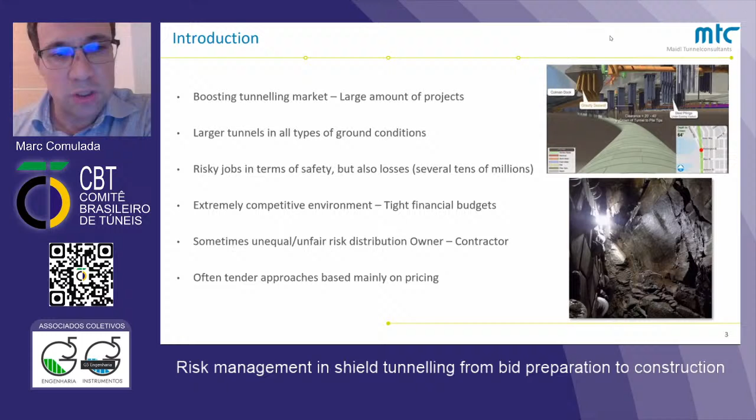So I think this is the framework, or let's say a snapshot of the present situation nowadays internationally. On the right-hand side I've put some photos. One is a snapshot from a video of the Alaskan Way viaduct replacement project in Seattle, with the largest EPB ever. You can see it was constructed very close to several foundations of the viaduct, in difficult ground conditions. At the bottom, we have a photo of difficult blocky rock conditions, which is the geology, and the technical conditions we encounter are one of the main aspects of risk.

Going to the tender documents, firstly there's this code of practice I'd like to show from the International Tunneling Insurance Group, where the insurers made a very nice exposition of the situation and how to best reduce risk, like what's the main structure one should follow when doing risk management. It's a completely voluntary code of practice, not a norm or anything like that. And it applies to project development, design, contract, and procurement for construction, so basically to everything except the actual operation of the tunnel.

It defines the basic structure of a risk management process that starts with hazard identification and their consequential risks in the different project stages. We obviously have many project stages to consider. Then we have the evaluation of hazards and their probability of occurrence. And then one of the key issues, which is the definition of strategies that are appropriate for preventive actions and for contingent actions.

And then they also recommend and explain the use of risk registers, which everybody more or less is doing—preparing the different risk registers for the expected risks. The risk registers actually are documents that clearly indicate which party is responsible for the control and management of the different risks. So it defines the risk allocation, which is actually a very important aspect—who's responsible for what.

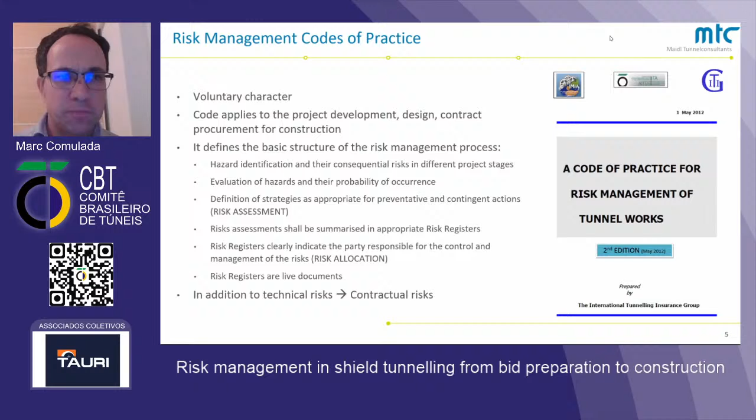So to start with, we also have the baseline conditions. The baseline conditions are the conditions given generally in the tender documents, and one of the main aspects are the geotechnical baseline conditions. Here we have, for instance, from the American Society of Civil Engineers, the GBR, the Geotechnical Baseline Report guidelines, which define the risk and liability framework of owner versus contractor. They're actually very well formulated guidelines, which unfortunately are not always followed, or very rarely followed. The idea of a GBR is to set clear, realistic baselines for the conditions anticipated to be encountered, and provide all bidders a single contractual interpretation of what is expected—so a fair starting point for all bidders.

And then obviously the other main purpose of the GBR is to understand all the ground and groundwater conditions at the site, and also to be able to estimate the financial risks associated with all these conditions, and very importantly, to clearly allocate the risks between owner and contractor.

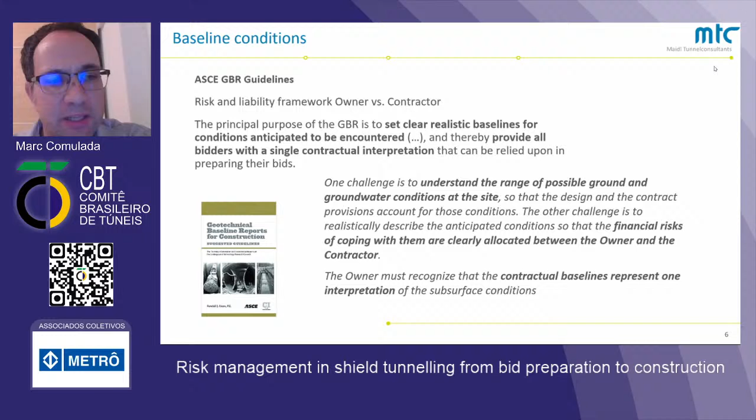Many situations, but in the US, from projects we know, they do follow these guidelines quite well as far as possible, because the geotechnical investigation is never good enough to make a completely fair and perfect baseline, but still it works quite well there.

We also have the FIDIC Emerald Book, Conditions of Contract 2019, which points out how important risk allocation is. The FIDIC conditions clearly state that you have to foresee potential remeasurements in time and cost—trying to be more fair to contractors, providing tools to measure if you encounter different conditions than expected, and to remeasure those differences and provide compensation if possible.

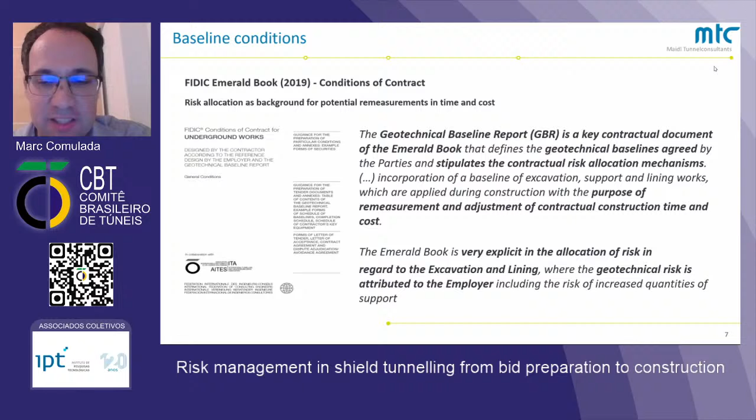So we do have these guidelines and conditions, which are all actually very fair and nice, but unfortunately it's not always as nice as these guidelines attempt.

So then if we go to the bid preparation stage, that's when the contractors receive all the documents and have to prepare a price at the time scheduled for the project. So it's vital to frame all the risks involved in that project.

On the right-hand side, I've got this table. We'll go through several topics in this bid preparation aspect: one is the ground conditions, then the design, then some case studies or examples, and finally the risk and opportunity evaluation.

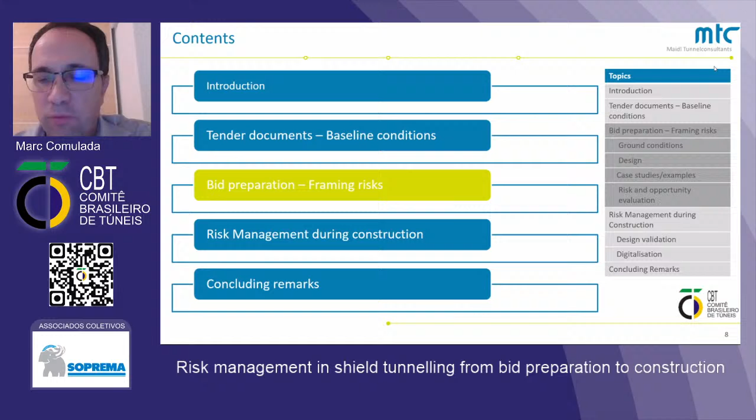The ground conditions are the key starting point for everything—for designing the works, for assessing and pricing the risk of your bid. They are one of the aspects that have a major effect on time and cost in tunneling, and insufficient ground investigations or poor interpretation of those investigations is one of the most frequent causes of collapses.

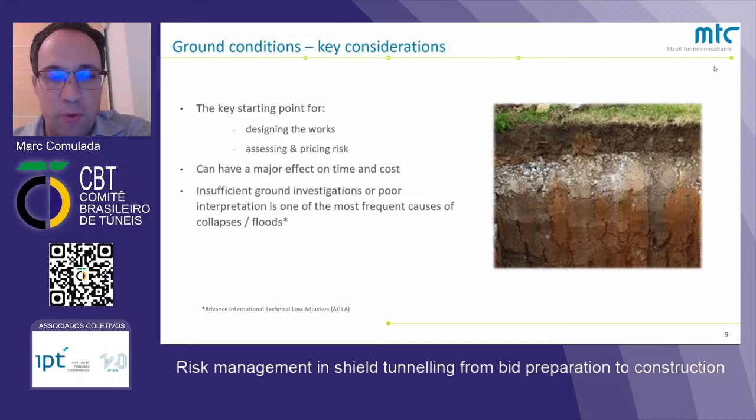This is information from the Advance International Technical Loss Adjusters. So obviously this is the first starting point: making a good soil investigation program and a good interpretation of that information.

But in reality, investigations are often limited. In tunneling it's always going to be limited—there's always a maximum number of boreholes we can realistically do. At the tender stage it's sometimes pretty critical; there's quite a lack of information, plus short tender periods, and reality shows it's difficult to assess this risk accurately.

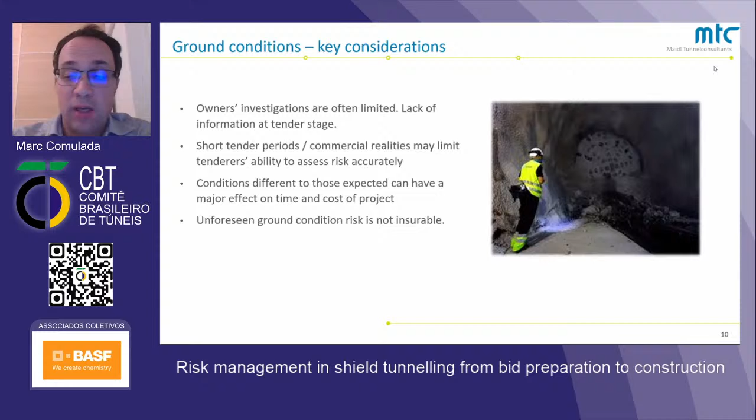Conditions different to those expected can have a major effect on time and cost of the project, and that's where the ability and experience of different contractors in preparing their bids comes in—actually being able to measure and frame these risks. Another important point is that generally ground condition risk is not insurable; it's not an accident covered by insurance.

Just to point out a little—I think most of you watching the webinar know this, but it's important to make the difference—an overall view of the ground we can encounter in tunneling. On one hand we have soils, which are generally unstable ground conditions where actual support is required; otherwise we can have a collapse or instability.

And it's not only about stability, but also about settlements, especially in urban areas, where we induce settlements at the surface or even underground if crossing underground structures, which have to be controlled. Other aspects that directly affect cost, time, and potential losses for contractors include tool wear in abrasive soils.

A soil doesn't mean it's easier or less abrasive than a rock. There are soils much more abrasive than rocks, for instance, to cut or excavate the bottom. And then we have another big issue: sometimes it's clogging in sticky soils, which hinders the projects and produces additional costs.

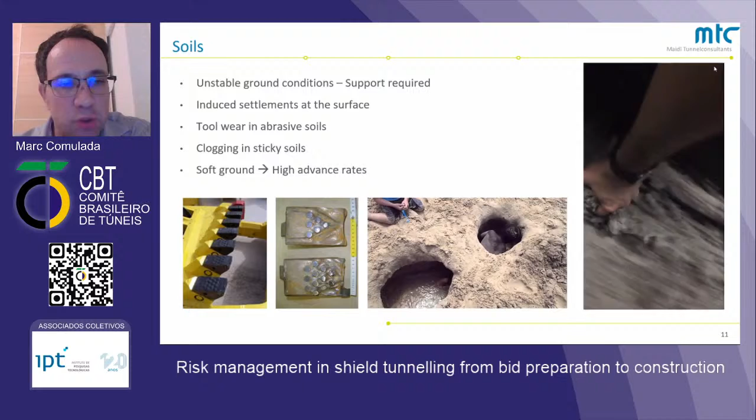The upside of all this is that generally in soft ground, contractors can attain high advance rates. They can expect high performance, which is always good, one of the positive aspects. And of course, soils can be unstable and tools wear. So all this has to be considered in the bid preparation, obviously.

In rock conditions, here at the bottom left, you have a very nice rock with a flat surface. You can see the paths of the disc cutters. So we have a situation where it's hard rock, but it can be excavated relatively easily. But still, generally, rock implies high tool consumption due to the wear and the energy needed to actually cut the rock.

The rock is cut with the disc cutters, forming the chips you can see here on the top right. This is the main purpose of the disc cutters installed on the cutter head: to generate these rock chips, which we can easily transport outside the tunnel. However, it's not always like this.

Many times we have blocky or fractured rock, and when we cut into it, the fractures can generate loosened blocks. You can see a very big block here loosened in front of the cutter head. Obviously, when the cutter head is turning, trying to cut this rock, it will suffer severe damage. Trying to cut this block, it will be moving, and it won't be nice rock like the one we see on the left.

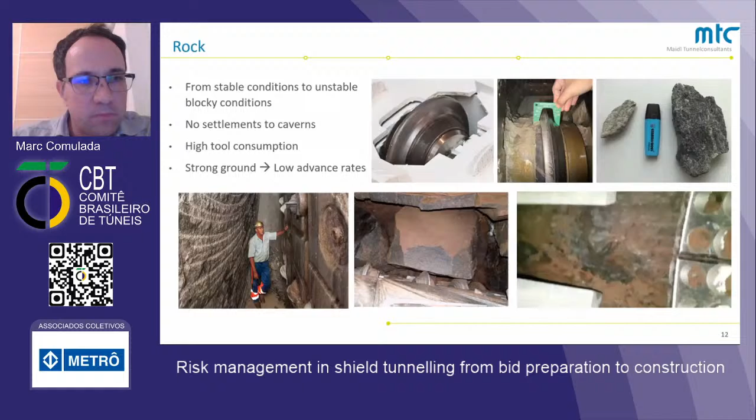And then we have mixed ground. Many of you watching this video from Brazil have experience with these grounds. We've lived them, we've had them, we've got experience with them in Sao Paulo and Rio, and it's actually pretty tough. What does mixed ground consist of?

This is a long section in Singapore. We have several areas in the world with a lot of mixed face conditions, especially in tropical weathering areas. The yellow layer here is a residual soil resulting from the weathering of the rock, which is located at the bottom in orange color. So in this case, we have the tunnel, the two red lines crossing exactly the transition between the sound rock, the good rock, and the soil.

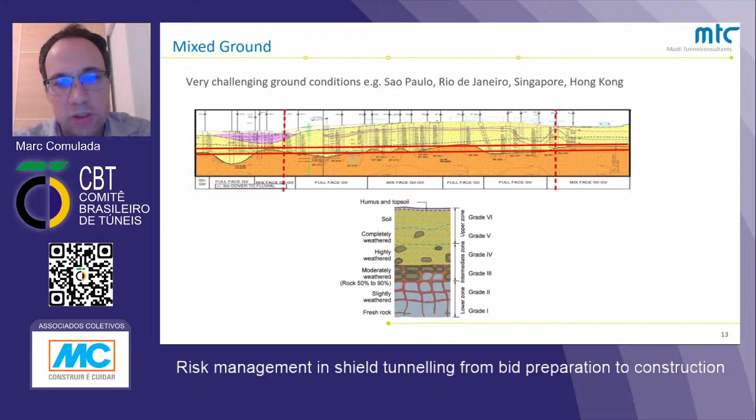This mixed ground condition poses a lot of difficulties when excavated with a shield, in shield tunneling. Here you can see the typical weathering grade of the rock: at the bottom, grades 1 and 2, basically good sound rock; grades 3 and 4 start to be more fractured. And as we go further up, closer to the surface, grades 5 and 6 are already more or less like soils.

Let's look at this in photos from reality. We start from the bottom left. Here you can see sound granite at the very bottom, weathering grade 1, 2. As mentioned before, a flat surface, no blocks, and you can cut rock chips very easily and nicely on this face. But still, we can have a high tool wear rate, since it's hard rock, and this generates a lot of wear on the tools.

Then we have conditions where the rock is starting to get more fractured, like rock grades 3 and 4, and we start having more blocks on the tunnel face, loosening of blocks. Here, in addition to the high tool wear rate, we also have impact loads acting on the cutters, generating more damage. And if we continue further up, closer to the surface, we get a higher weathering grade. Part of the rock has already weathered into sort of soil, but we still have sound rock boulders within that matrix.

And here we start getting these boulders trapped into the openings of the cutter head or trapped between the tools, and we start to have blockages, and they start to drop in addition to the other ones we already had. And finally, when we get to the upper layers where we have more soil, then we start having ground instability. The soil isn't stable, so we have to start stabilizing it, pressurizing the shields, generally with water.

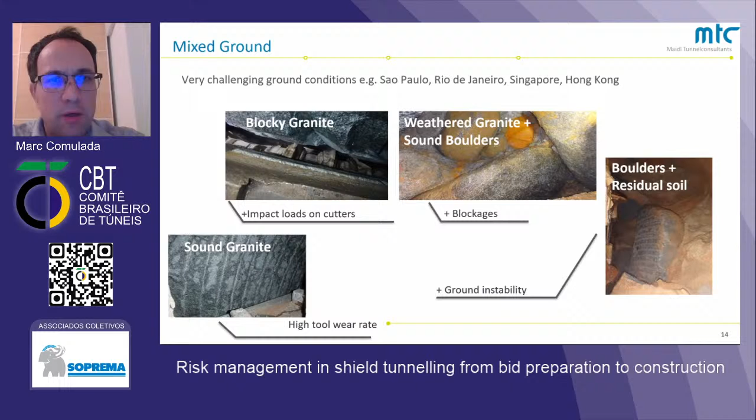So in this situation, you can imagine we have a whole combination of risks that are occurring at the same time on the tunnel face. And then there's obviously a variety of additional risk conditions related to the ground or indirectly to the ground, like karstic cavities, for instance. Then environmental risks, like contaminated soils.

We have the situation of the two super large EPBs in the Westgate project in Melbourne, Australia, where the shields are built there, but they've been stopped now already for several months since they found out the soil contains PFAs, which have to be treated very specially with special disposal sites. And this is delaying the whole project. This is a risk that just appeared.

And then we have sometimes restrictions to the construction procedures. Sometimes we have space restrictions, and we have to build the tunnel or advance the shield without installing the backup, for example. And you can't have a continuous drive. You have to excavate, let's say, 10, 15 centimeters, then stop, extract the material by cars, whatever, and then you can start again. So there's sometimes these restrictions to the construction procedures, which imply additional risks to the tunneling process.

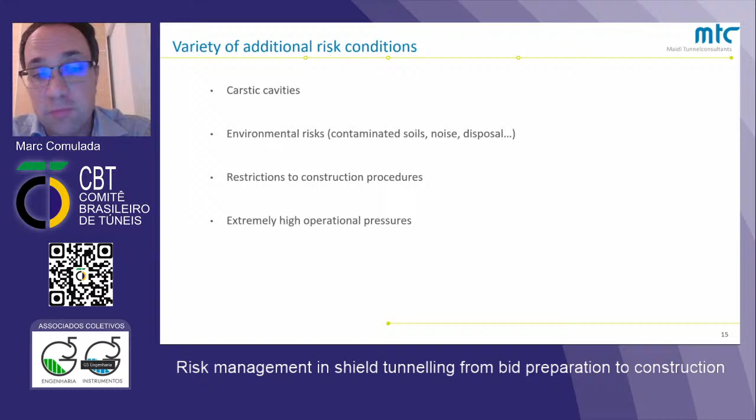So how do we deal with this? We have this wide range of geotechnical conditions, wide range of technical and geomechanical parameters from the soil investigations. We normally have a minimum value, a maximum value, an average value, quite a wide range. And many times the information is not as complete as it should be to have a full view of all the risks or to quantify all the risks properly. The information is rarely available completely.

So we have this problem because these are all key input values, these ground conditioned parameters, these geotechnical parameters. They are key input values for the construction method and equipment selection, number one, and also to estimate the performance of your tunneling works and the consumables. So all the things that are generating cost and time, you base mainly on the geotechnical conditions, and these are not always as complete as they should be.

So there's a lot of interpretation going on there. Obviously there's a high degree of uncertainty. And that's why an approach, at least what we follow, is to follow several scenarios: a base case scenario based more on average parameters, a best case scenario based on good technical parameters, and a worst case scenario based on the poorest geotechnical parameters, more or less.

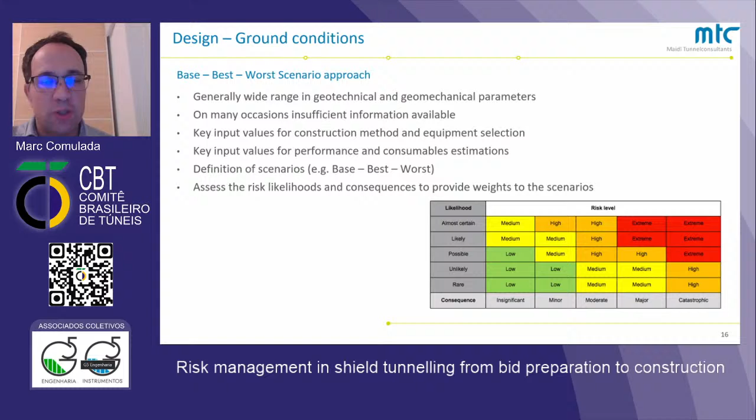So this is basically how contractors have to deal with these risks. And this is very summarized. It's all very complex. There's a lot of studies to do this during the bidding stage in a very short time. But this is more or less the procedure.

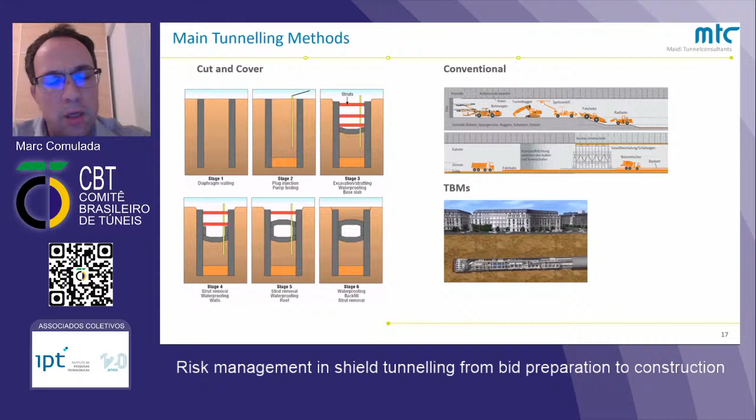And then, of course, based on all this, you have to decide the main tunneling method, which most of you here know about, and we are focusing today on TBMs. Sometimes the tender documents already prescribe the construction method, but sometimes the contractors have to decide which is the best method, and that is all based always on these geotechnical investigations.

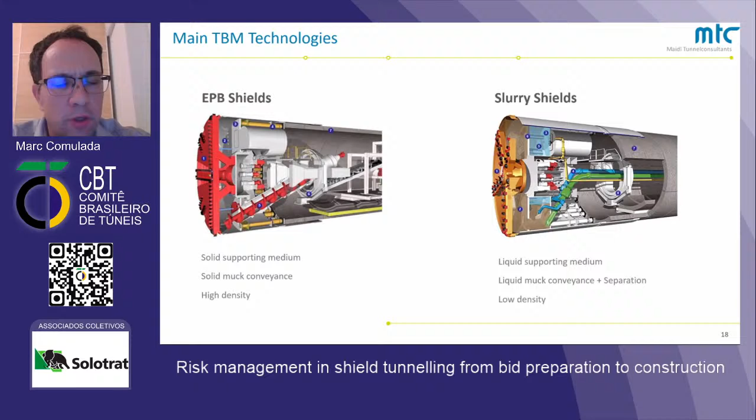Obviously then focusing on TBM technologies, as I mentioned, that's the title of the webinar. So as you all know, we have EPB shields and slurry shields. The concept of EPB works with high densities in the excavation chamber with dense muck, whereas the slurry shield works with more liquid muck, what we call a low density. This is a crucial difference in selecting the two methodologies. And in between nowadays, we have what we call the hybrid shields, like the variable density shields of Herrenknecht shown here in this picture, where you can adjust more or less the density in the excavation chamber, covering the scenarios of both EPBs and slurry shields.

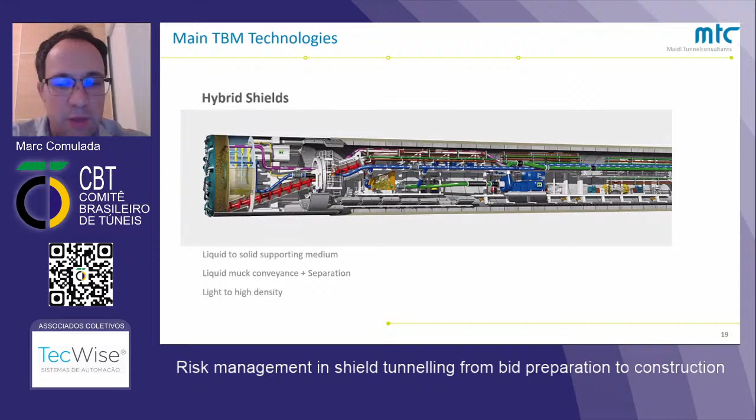Well, these are things that we explained, I think, in the previous webinar. And then, so based on the ground conditions, we can do a selection of the TBM. That's, as I mentioned, something we dealt with in the previous webinar with Ulrich.

But there's other factors which are very important for the contractors when deciding what technology to select. One can be as easy as the availability of refurbished TBMs, because those you don't have to build from scratch, so they're available in a shorter time. That shortens your construction schedule, but maybe they're not the 100% perfect TBM for that ground. Then there's also other aspects to be considered, like restrictions on muck disposal, the surface available on site for site installations, and obviously also the experience of the bidding team. We have remarkable projects where the technology has been selected sometimes more based on these factors than on strictly geotechnical factors.

So all these factors, it's not only the geology in this case, there's all these factors that are then, let's say, molding or varying the risk level of the project.

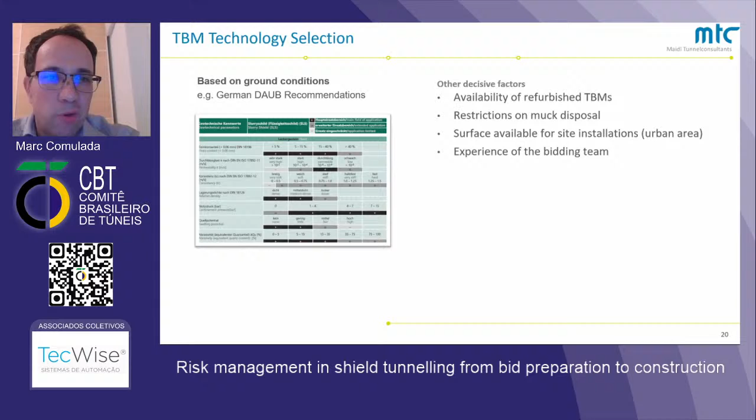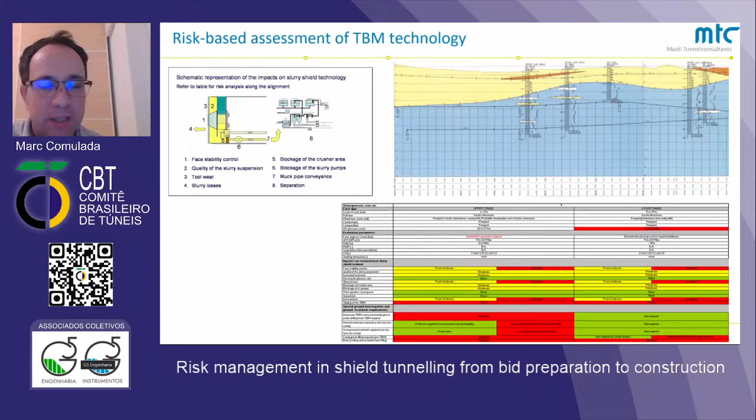Then we can do the same comparison for a slurry shield technology, comparing different aspects also for different critical processes on the slurry shield technology. And in this case, you finally come to the conclusion that, for Kuala Lumpur, a situation between an EPB and a slurry shield would be optimum, and that's more or less where the variable density shields were born, in a situation like this.

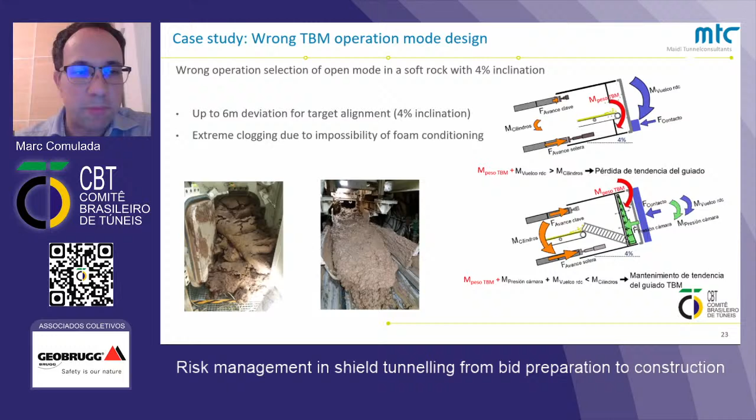There's another aspect, as I mentioned, we're focusing this from the view of the contractor, from the view of the TBMs, and you have the cutter head. The cutter head is one of the key components of shields, in charge of cutting the ground and evacuating it as efficiently as possible from the face towards the excavation chamber and then outside the tunnel. So the design, with the quantity of tools, the opening ratio, and the distribution of the openings of the cutter head, has to match the ground condition extremely well.

It's also the component of the TBM that suffers the most wear and tear. And obviously, with larger diameters—projects are getting larger worldwide—we have higher wear rates, as we discussed in the previous webinar.

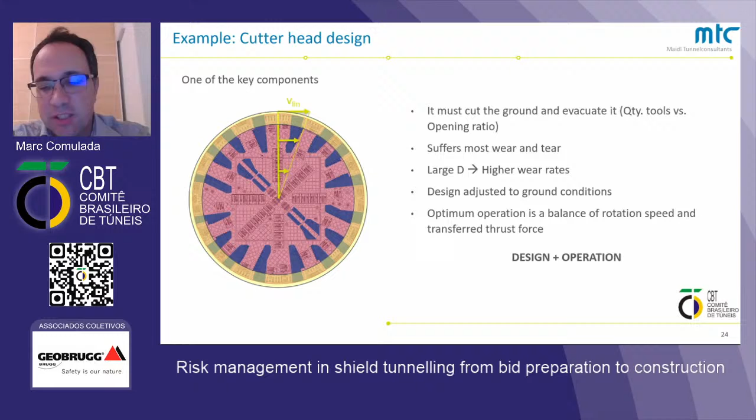So the design of the cutter head is crucial and has to be adjusted to the ground conditions. Then there's the operation: not only of the cutter head, but the balance of the adequate rotation speed and the contact force of the cutters against the tunnel face. That's also crucial to avoid the risks of damage and excessive wear on the tools and the cutter head. So the cutter head is a design and operational issue that has to be taken care of.

Continuing with the cutter heads, so that you realize how the ground conditions influence the design of the cutter head, I'm showing two extreme cases: a purely rock TBM cutter head, very closed, with a lot of discs.

You need a lot of disc cutters in order to cut that rock into little chips that then fall by gravity and are picked up by the buckets you can see here on the periphery and transferred behind the cutter head.

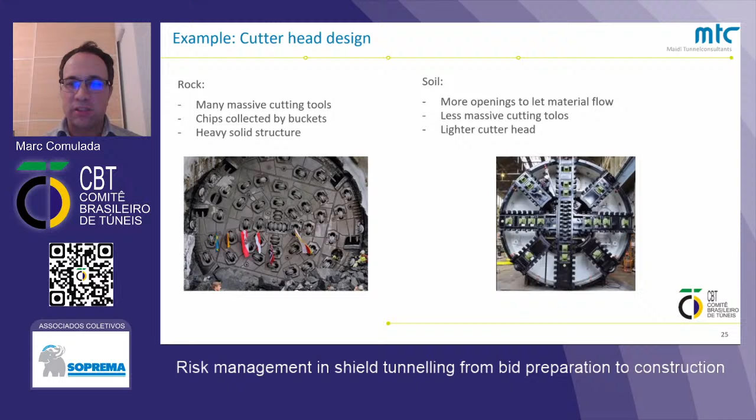Whilst in soils, we have a situation with a much lighter cutter head. It's not going to be as robust as the cutter head in rock. It doesn't have to handle such high forces. It's just got to allow the soil to flow towards the excavation chamber, and you need less tools to excavate it.

But then, as I mentioned before, with mixed face conditions or mixed ground, we have a compromise design, because we have situations with rock, situations with blocks of rock mixed with soil, and situations with purely soil. This is where we have to approach a compromise design.

In this case, you have a cutter head that has to handle also very different forces. You can have rock at the bottom and soft soil at the top. So you have a very high imbalance of reaction forces against the cutter head, which has to be considered in the structural calculation of the cutter head.

Actually, there are projects where there's damage on the cutter heads due to these high different loads. And in addition, there's other elements like the tools. You can see broken disc cutters, or in the openings, the grizzly bars components that are bending on the cutter head due to the presence of blocks, for instance.

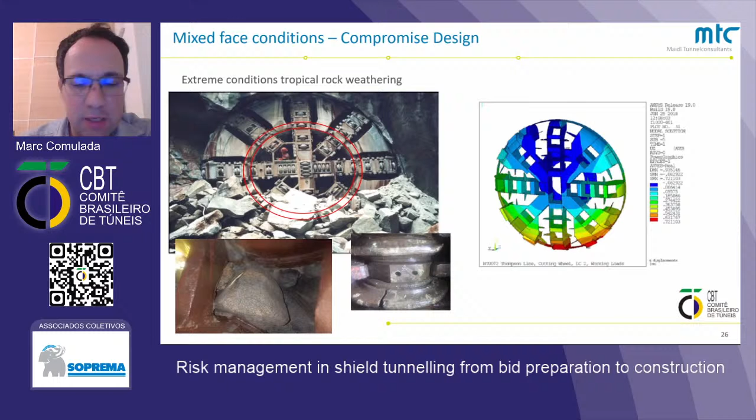So these design aspects of the cutter head are, in many projects, one big problem and one big risk that ends up generating a lot of losses in terms of money and also in terms of time.

All these aspects should be considered during the bidding stage when a contractor is estimating all their costs and all the risk level, and that's where they do their risk and opportunity evaluation. You have to be able to foresee the ground-related risks, and this requires thoughtful and expert evaluation in order to do the right TBM selection and the right TBM design and specification.

Then you must also be able to plan a contingency for foreseeable eventualities based on the risk assessment. These contingencies are crucial in the bid preparation. And approaches like the one I mentioned before with best, base, and worst case scenarios in order to estimate advance rates, TBM performance, consumables of tools, of ground conditioning products, and also to estimate the interventions.

In this evaluation, there's generally a high level of uncertainty. We have very different scenarios between the best and the worst. And the contractual baseline conditions.

We're talking about very technical aspects here, but then we have also the contractual baseline conditions. You need really the legal guys checking what is your situation contractually, where is your responsibility limited, is there a limitation to your responsibility or not, so you know where you can act in the contract.

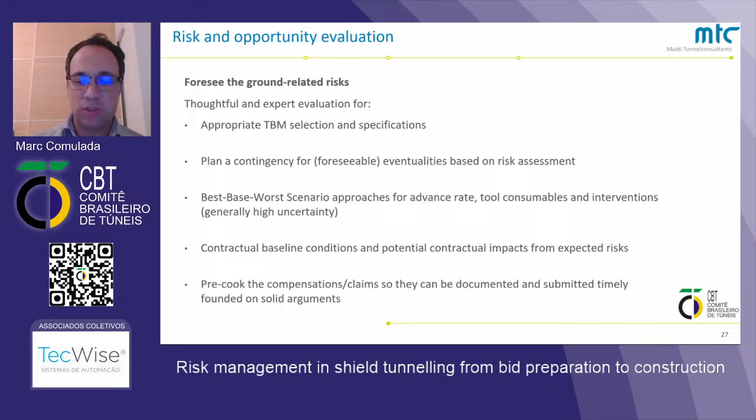So now we go to the construction stage.

So during construction, I'm focusing here on the TBM performance, because TBM performance is related to time and financial costs in TBM tunneling projects. So one aspect is the net advance rate: how fast can I excavate in this ground? Can I excavate as fast as I planned in this rock or in the soil?

Then there's the aspect of interventions and tool intervention spacings. We already presented this in the previous webinar. You can plan your intervention areas, designing safe havens to do interventions, but you'll also have situations where you have to do compressed air works in difficult ground conditions, requiring all the equipment and time to do hyperbaric interventions. And then we obviously have the logistics behind the TBM, which also has to work perfectly.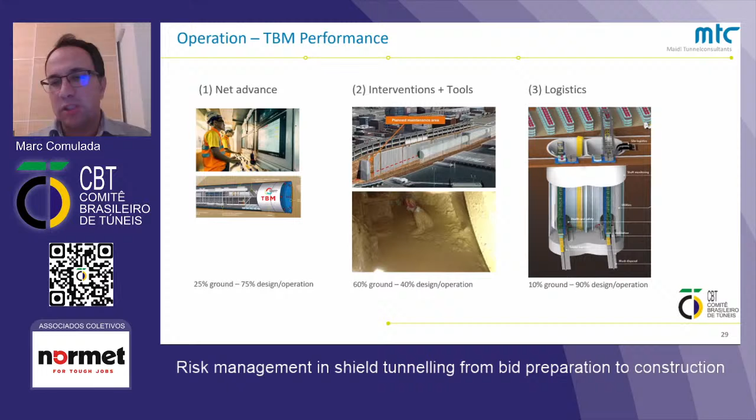And then the logistics. Logistics is basically more a planning aspect, depending more on design and operation.

And so then construction - this is the main key for risk minimization: the validation of the design during construction. This is actually one of the premises of the risk code of practice, and it's very important that the contracts make provisions for monitoring of the tunneling works, and also that trigger levels are defined at which contingency actions must be taken. This sounds very obvious, but there are many processes involved which need to be actually monitored.

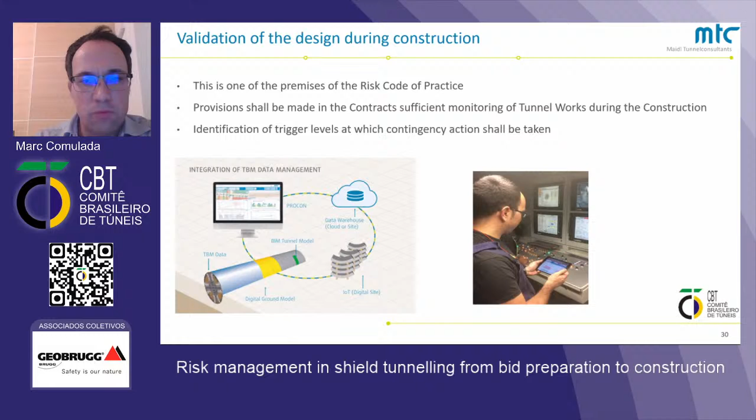So here is where we always point out how much digitalization nowadays can help in minimizing the risks during construction, since an adequate interpretation and as real-time as possible interpretation of the ground conditions allows us to identify risks that we cannot know anyway.

Here you can see an example: this is the profile of rock in Singapore, and you can encounter mixed face conditions. You can identify these mixed face conditions from the TBM data, by analyzing the eccentricity of the thrust jacks of the cutter head with respect to the cutter head contact force. We can actually identify situations more like full face rock or more like mixed face.

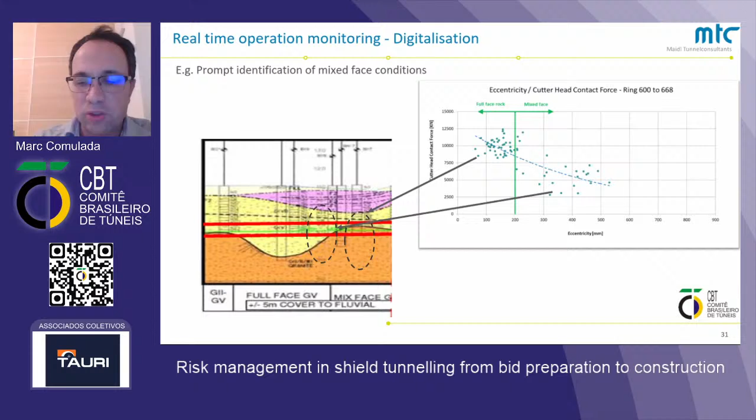So identifying these conditions matters since we're excavating in grounds where the transition from rock to soil is very variable, and in many situations it cannot be foreseen everywhere. We have to use these tools to identify these conditions and then adapt the operation of the TBM to the encountered conditions.

And this is an example here. You can analyze the penetration index at the very top. The penetration index is the contact force of the disc cutters divided by the penetration, so the higher it gets, the more difficult it is to cut the rock or the material. Then we have the specific energy of the ground, which we also taught in the previous webinar - it indicates the energy per cubic meter needed to excavate one cubic meter of ground.

And here is a nice example: you can see ring numbers 143 to 148. These are five rings where we were actually working with low penetration indexes, typical of a soil-like material. We had reasonably low specific energies.

And here we can see from the pressure distribution in the excavation chamber, we're operating in closed mode, indicated by the picture below. As soon as the specific energy started to increase to values we know are critical and induce very high wear and damage on the tools, and at the same time the penetration index is increasing - indicating the rock phase is getting better, more of a rock type phase than a soil type phase - and I'm still working with a full chamber, that's what's generating this high specific energy.

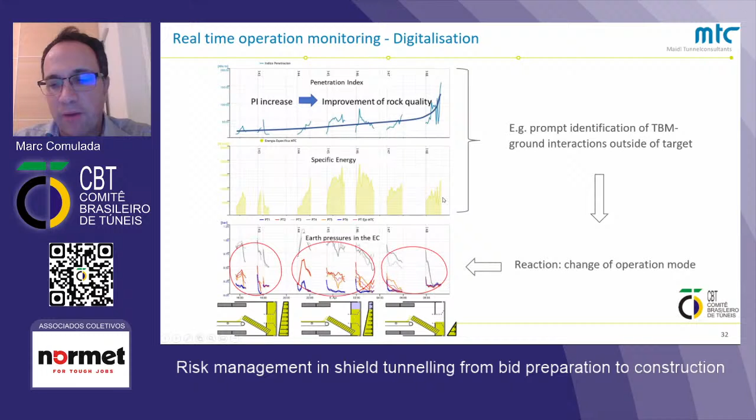So this is a timely adjustment of the TBM operation mode to the ground conditions. If this TBM had been operating with full chamber mode, with this high specific energy up to this point, I'm 100% sure there would have been huge damage on the tools, and maybe even on the machine.

So after these examples and after pointing out several aspects of how to approach risk management, I would like to present the concluding remarks. Number one: construction risks are increasing, not decreasing. On the contrary, projects are more challenging. We have larger diameters, and more difficult ground conditions to handle with. Then, obviously, risk management is key in all stages of the project, from the contract to the project delivery.

And we still have losses and accidents occurring, and many cases where you actually see these were avoidable. So we are in a very risky industry, where risk minimization requires a multidisciplinary and expert approach. There's many fields involved, including legal, engineering, and geology. And obviously the ground conditions are the primary source of risks. But there's not much at this time - not a high prospect of improvement in interpreting the ground conditions yet.

So in consequence, we sometimes have to design too conservatively, and it's imperative during construction to observe and validate the design assumptions. I would like to point out that construction technology is advancing a lot - there's a lot of innovation, and technology available to minimize risks efficiently. But unfortunately, what we see sometimes is that the tools available to minimize risks are not always used to their full capacity. So with this, I finish the presentation.

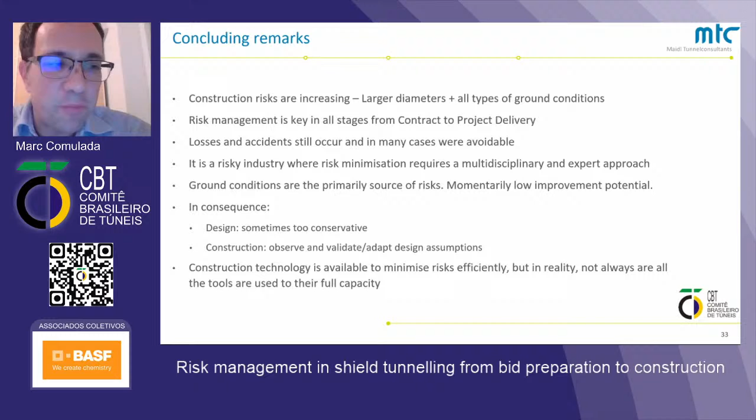Thanks so much, Marc. It's a fantastic theme. Yes, there I am - it thrills me a lot because it's very much the theme of my PhD and now from my postdoc. Before people start making questions, I have some for myself.

I really like several of your slides. You mentioned quite a lot about the ground conditions, that they are a primary source of risks. And we have the GBR, and how important it is to bring all this information into the GBR. You also mentioned the importance of the effect that wear, clogging, and soil conditioning have on the risks of tunneling. So why are we not bringing the characterization and evaluation of wear, wear estimation, clogging, and the characterization of soil conditioning into the GBR? Wouldn't it make sense, because we focus the GBR very much on parameters that matter a lot, but these aspects - the influence of wear and the estimation of clogging - matter just as much as the others. Wouldn't it make sense to include that in the GBR as well?